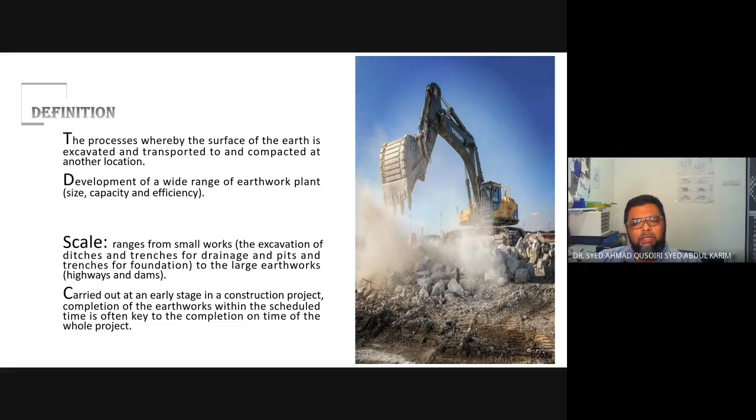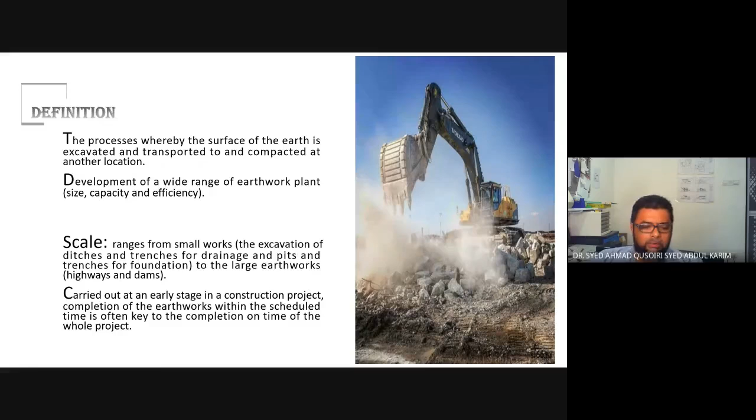The earthwork itself needs to be planned properly, and planned in accordance to the climate and weather, so that it will not get stalled due to rain, snow, and things like that. The success requires adequate site investigation, preparing practical and satisfactory design of earthworks, and the choice and efficient use of the plants and machineries.

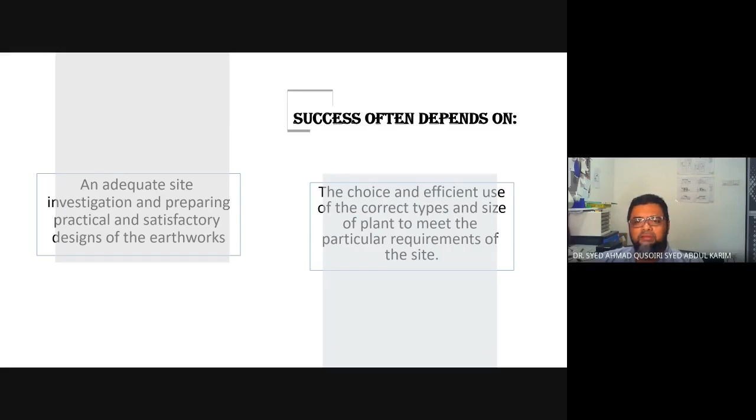Before we start digging, the site itself must be investigated, the condition of the site and whatnot, and also the soil conditions by doing soil investigations. Being able to conduct all these on time will obviously depend on your machineries. So the general considerations for earthwork we have, as I said, the site consideration and also the ground conditions. So we'll go into that, and then the techniques of excavation. Okay, we have 5 there.

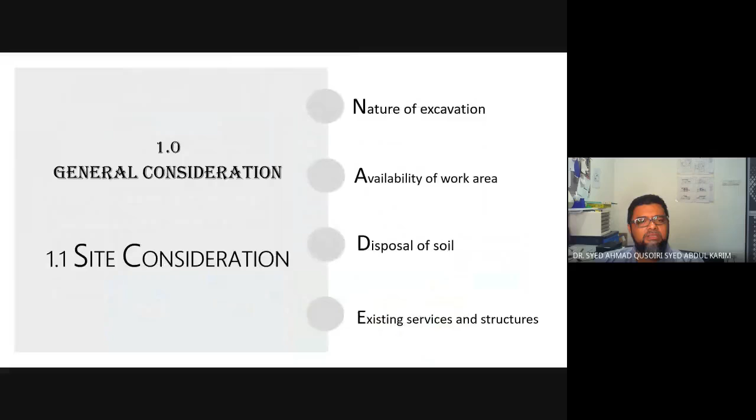Let's go to the first one, site consideration. So the site considerations, we have 1, 2, 3, 4 points here. Obviously, there would be more, but these are the main points. First of all, the nature of excavation. So, what kind of excavation are we talking about here? The situation of the excavation to reduce level, roadwork, trenches, basement.

So there's a lot of types of excavation, whether it's to reduce the level to reach the platform level that is required, or we are doing excavation to dig up trenches, or to create pits or holes in the ground. If we are talking about the larger scale, we are talking about basements. Or even the excavation itself is being done for tunneling. So that is considered as part of the earthworks.

We have to consider the time available for excavation and the sequence of the completed earthworks. So depending on the type of earthworks, usually we have limitations, especially in terms of space available for people to conduct the earthworks. We have a limitation in terms of time. We have limitations in terms of the machines that are available to us. Before the earthwork even starts, it needs to be planned meticulously in detail.

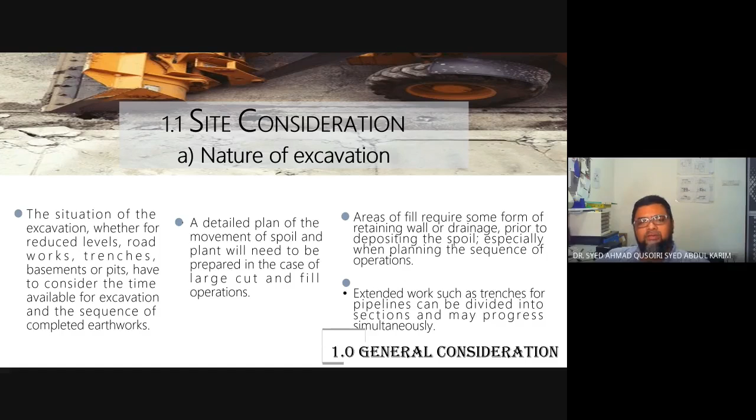Each of the packages will be awarded to a contractor — the second package to another contractor, the third package to another contractor. So all these packages can run simultaneously, instead of having just one contractor do everything, which would take a long time. That's the nature of excavation. The second point in site consideration is the availability of work area.

So the term work area does not include areas for site admin or accommodation of workers. This is just a place for people to work.

The total work area should be indicated on a site plan so that movement of plant and materials can be efficiently planned. This is when the contractor needs to come up with the method statement for site excavation, with a proper plan showing the work area, admin, accommodation, entrance for plants and machineries, areas to excavate first, and location of the excavator. All these things need to be spelled out in the drawing and the document. Work area is the total space available for the manipulation of plant and storage of materials.

If you are talking about excavation for reduced level, normally in terms of access, there won't be much issue. But when we are into excavations for deep trenches, or deep pits for construction of a basement, then we are talking about a very cramped working area. The flow of manpower, machineries, and materials needs to be orchestrated properly, because people will need to be sharing the work area together.

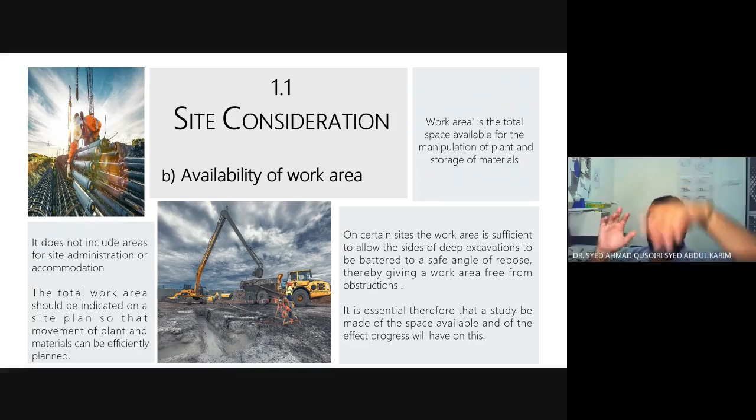Depending on the size of the pit, there will come a time where there are so many obstructions in the pit that we can't even place our machineries there. That is when they need to use other solutions, such as a long arm excavator located at the top of the pit to do the excavation, or use small scale machines, or even go 100% manual.

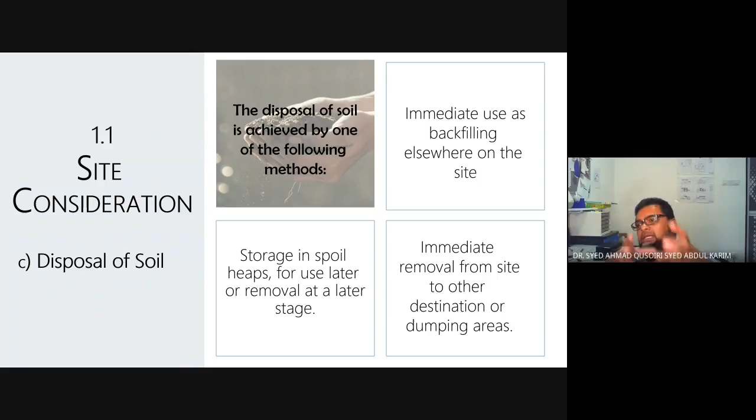Next, the third point is the disposal of soil. If you are not reusing that soil, you need to dump it somewhere. There are three types. First, the most economical is immediate use as backfilling elsewhere on the site. You do your excavation, and that spoil can be taken immediately to somewhere it can be used as backfill. Maksudnya, your excavator excavates, puts it on the dump truck, and the dump truck goes where the spoil is needed and dumps it there. So you save in terms of time, cost, and number of machines that you need to have.

The second one is storage in spoil heaps for use later or removal at a later stage. Again, your excavator excavates, puts it on a dump truck, and the dump truck goes somewhere and dumps the soil there. If that soil needs to be used at a later stage, we need a bulldozer or a loader, depending on your method statement. Maybe a loader goes to the spoil heap, longgokkan tanah, it will load up on the spoil and put it on the dump truck, which will then carry it to where it's needed or to the disposal site.

So on that method statement, you would need one extra machine, which is the loader. Okay, so that is an extra cost for you.

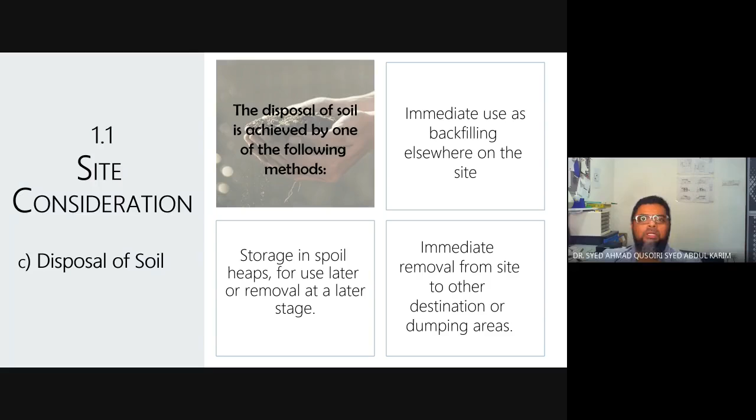When we talk about using the spoil as backfill, not all type of soil can be used for backfill. Okay, especially the topsoil - that cannot be used. It can be used later only as a topsoil.

So when these materials are being gathered, it needs to be separated. You separate the topsoil from the actual soil itself. And then you separate it if you have rocks.

So consideration should be given to the position of such spoil heaps, in order they should be positioned that they do not interfere with access. Okay, when you need to use the soil later and you want to put it somewhere, it must not be at the middle of the road.

Okay, so the position where you want to dump all your spoil to be used later also needs to be indicated clearly in the drawing. Okay, so that it doesn't become a danger to everybody and it is not blocking the access of workers and machines.

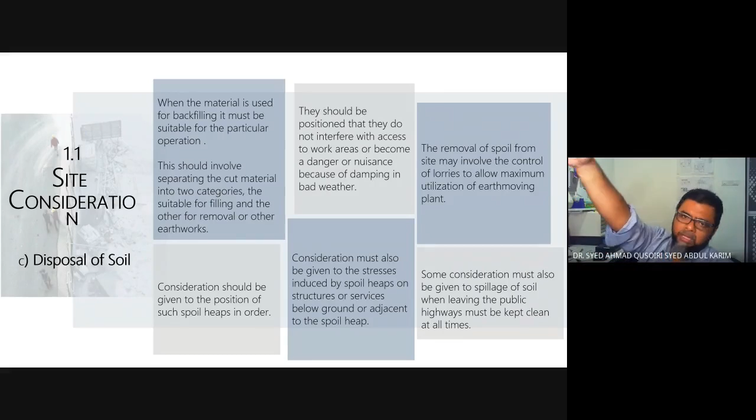Okay, so usually there's a calculation for this. Depends on how far the dumping site is, how many dump trucks we have, how fast can they travel, this kind of things. Okay, there's a calculation for this. But I don't think you will go that detailed. But I have done that calculation, okay, when I was studying. Okay, it can be quite interesting.

So some consideration must also be given to the spillage of soil when leaving public highways.

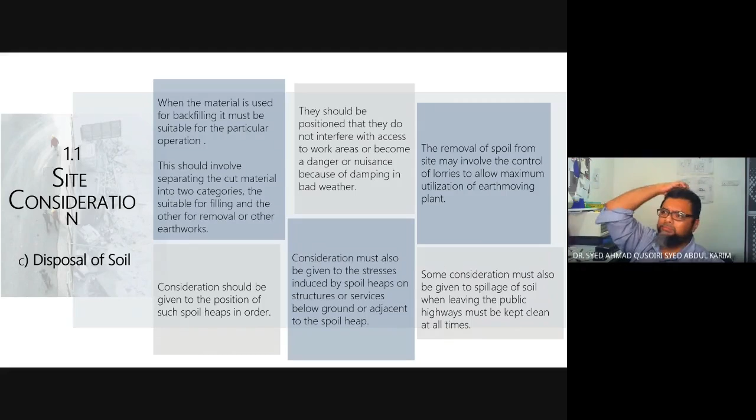When your dump trucks need to leave the site to get to the dump site, again it needs to follow the rules and regulations of the road, and the dump trucks must be covered with some sort of plastic cover, things like that. And then obviously, whatever they do, there will certainly be spillage of soil. Of course they have cleaned up their dump trucks before they leave the site, but still soil will fall onto the road.

The dump trucks, which are heavy, would obviously damage parts of the road or the roadside. So these kind of things, the contractor needs to pay attention to, needs to clean them up, and then all the damages to the public road, to the public facilities, needs to be rectified, needs to be repaired. And this will incur cost to the contractor.

So all these things need to be put into the overall cost of the earthwork itself. It's not just the cost of digging up the soil. There's a lot more that will contribute to the increase of the cost of the earthworks.

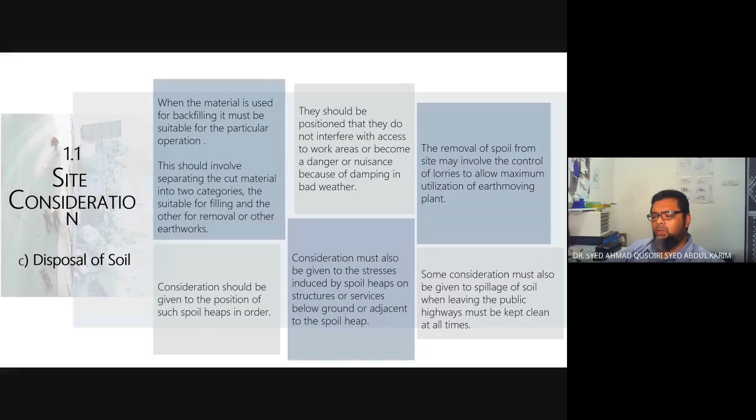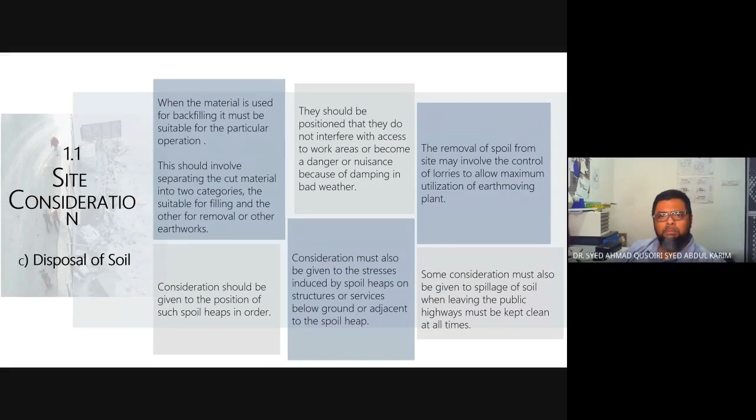So that's why the best earthworks is the most minimum earthworks. We want to do earthwork as little as possible. This is of course to reduce the cost, but also to reduce the impact to the environment, to society, things like that.

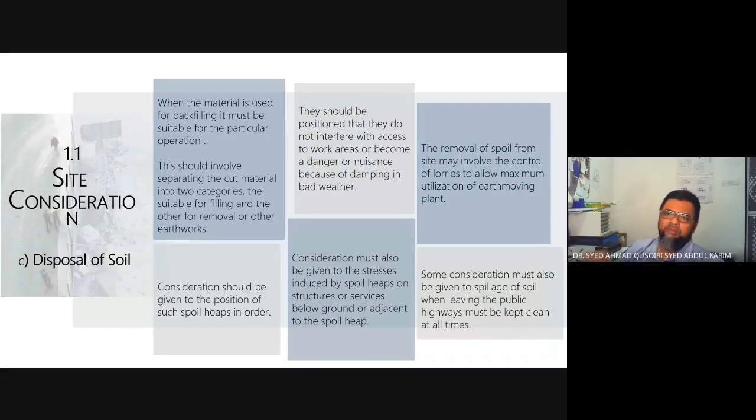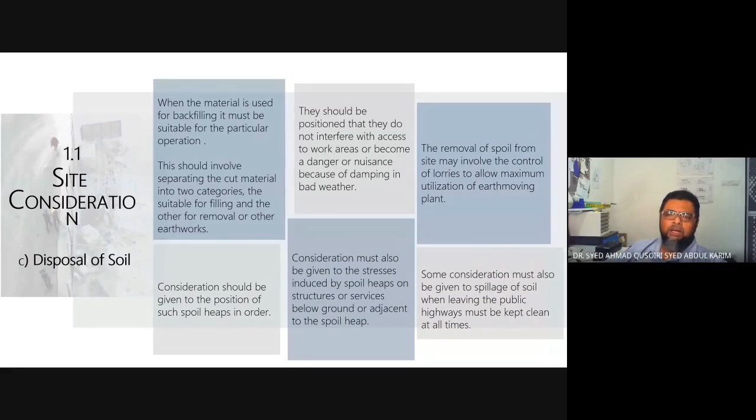So that's why when we see roads that go through the mountains and things like that, we will follow the contour of the mountains. It will not go through the mountains, although there are some roads that practically go through a mountain, but usually they would follow the contour. This is to keep the cost down.

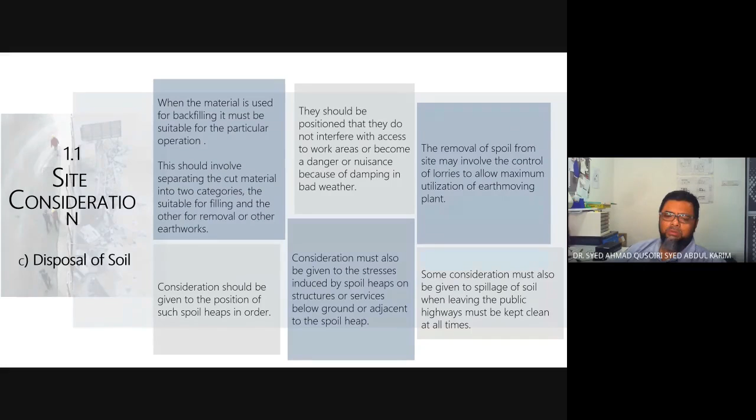And the fourth point, existing services and structures. This is when you are doing your earthworks smack in the middle of a city, or what they call a populated area. So care should be taken to establish the position of all pipes, cables, and underground services, which should be clearly marked before earthworks commence.

So it is the duty of the contractor to find out as much as possible what services are passing through their site. This is very important if you have an elongated site, such as road construction, trenches, and things like that. Obviously there will be services or underground structures that pass through your site. So the contractor needs to find out where the pipes are, where the cables are.

We just had an incident where a contractor damaged a TNB power line, and people ended up with no electricity.

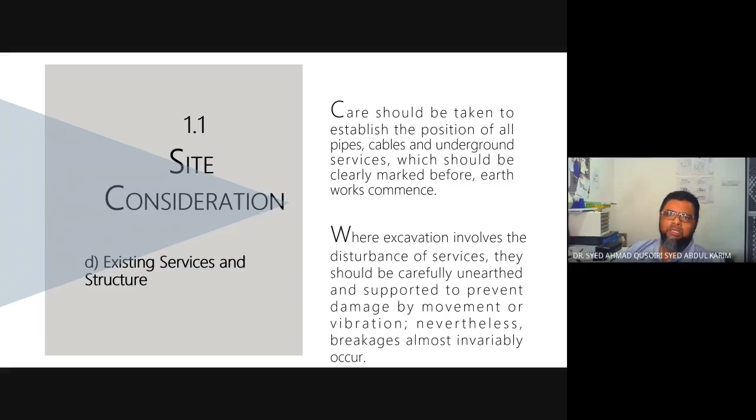So other solutions need to be carried out. Existing structures adjacent to the excavation area will require support.

This is when you are trying to support the services. So these are the supports that you can use. Cut-off walling: a thin watertight wall of clay or concrete built up from a cut-off trench to reduce seepage. So you basically are building a wall underground before you start doing your excavation.

So this is a concrete wall, usually these days, a cut-off wall. We can also use sheet piles. Sheet piles are usually for temporary works, while the cut-off walling is for permanent use. We drive the piles into the ground, and they interlock with each other so we can make them watertight.

And then we start excavating inside the row of piles. And then we can also use underpinning.

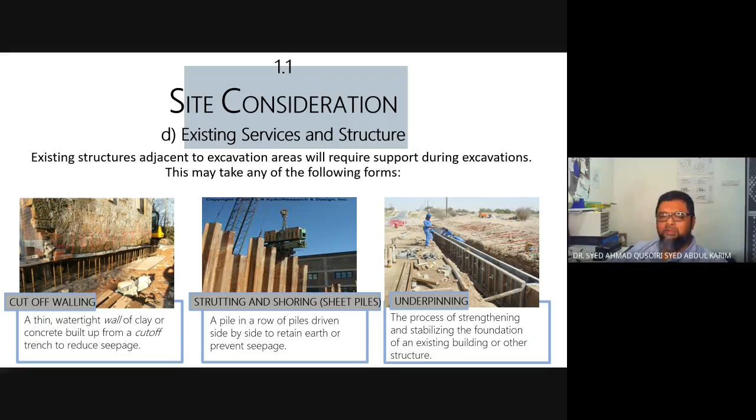This is when we need to strengthen or stabilize the structure adjacent to the site that we are digging. This is usually for basement constructions in the middle of the city, because basically you're digging a deep hole. So no matter how much support you put, there will still be movement to the soil. So to avoid this from damaging the structures around it, we can support the structures, especially the critical ones, with underpinning.

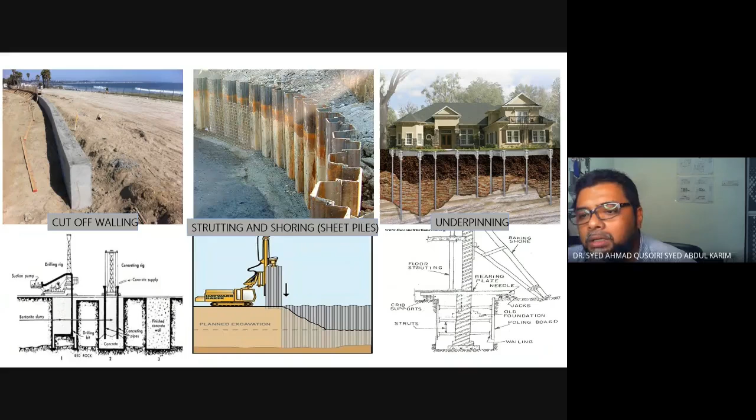So you can see here the examples of a cut-off walling. This is a permanent feature. Sheet piles serve the same purpose, but are more of a temporary feature. And the underpinning works to strengthen the structure.

This is on ground condition. There's not a lot of stuff here because it can be quite technical, but in general, the information obtained from the site investigation, which we've previously talked about, will assist in the following factors. Number one, we want to determine the ground support required during excavation - what type of ground support we need to use, how much, and how elaborate the design is.

Those kind of things. Number two, the method of keeping the excavation free from water. As we know, water is the number one enemy for doing excavation, especially pit and trench excavations. So we want to remove the water from the pit or trench we are excavating, and also consider the types of plants that need to be used.

Consideration needs to be given to the change of soil stability due to adverse weather conditions. This is because the presence of water will reduce the load-bearing capacity of the soil. The water acts as a lubricant that makes it easy for the soil particles to move. That's why we have landslides and whatnot happening, usually after heavy rain - this is because of the water itself.

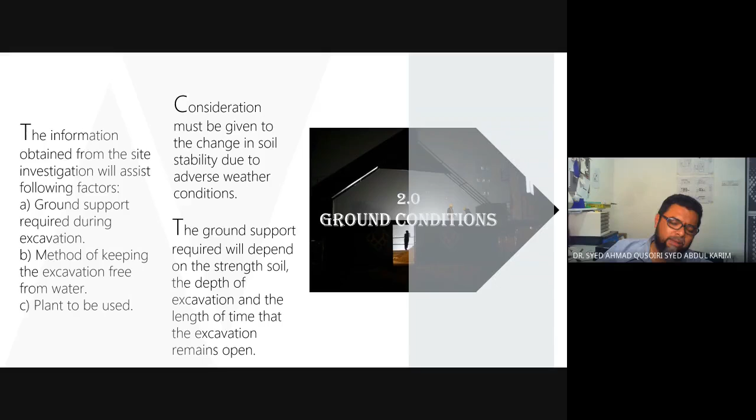Basically, the deeper you go, the more elaborate and rigid type of ground support is required. And the longer the excavation remains open to the weather, the more elaborate types of ground support are needed. So that's why the best kind of excavation is the kind that can be done relatively quickly, but usually that is not the case.

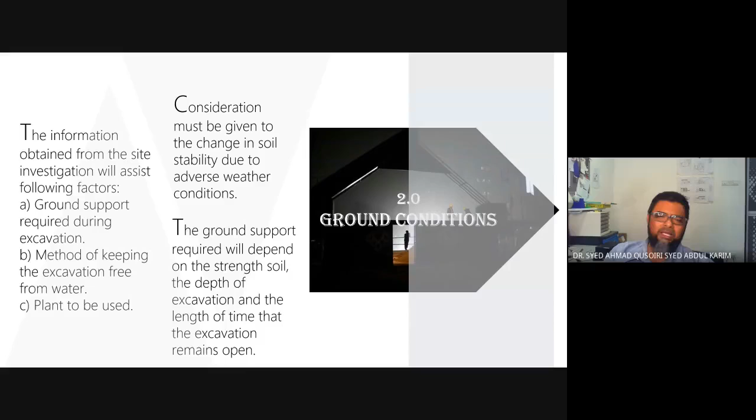So, various techniques of excavating and their choices - we will go through some of them. We have bulk excavation, rock excavation, support, embankments, and trench excavation.

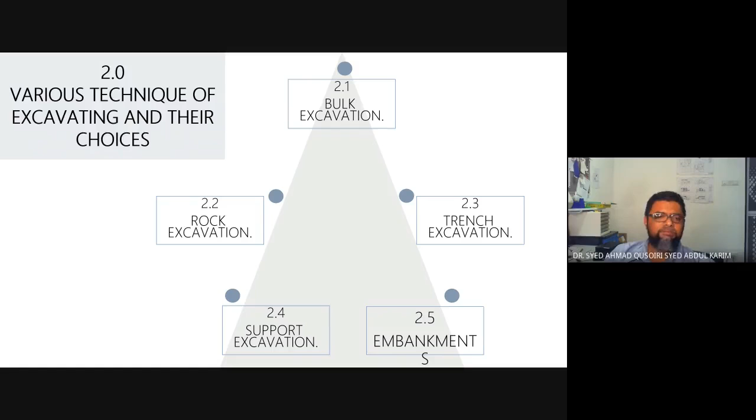First of all, bulk excavation - groundworks which remove large amounts of materials and reduce the general level down to near formation level. They are made with large and efficient excavators, so these are excavations made in huge quantities. That's why they are known as bulk excavation.

The operations which might be involved in bulk excavation include cutting, cut and fill, basement, large pits, and hand excavation methods.

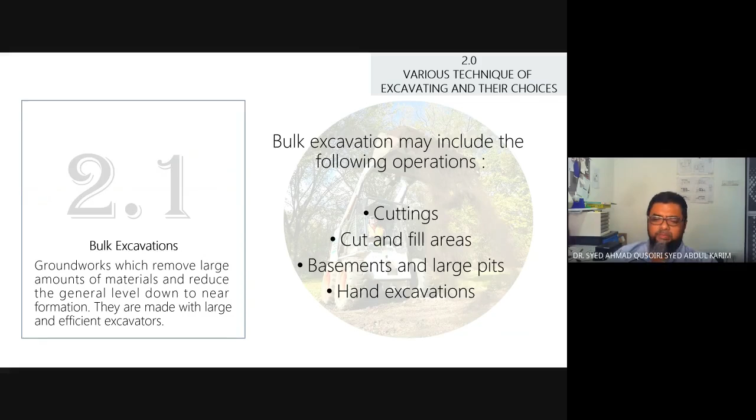In terms of cuttings, it's done for canals, roads, and similar forms of construction. The plant being used depends on, again, the quantity of soil you need to deal with, the distance of the disposal area, conditions on the ground, water level, and those kind of things.

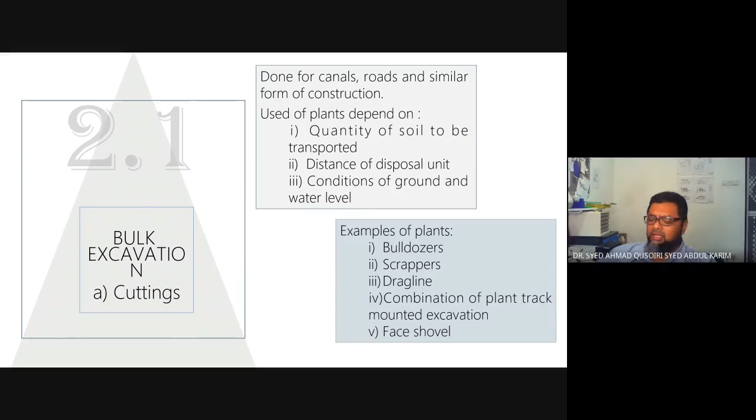As I mentioned previously, in terms of types of plants - there's a lot more earth-moving plant than this, but these are the main ones. First of all, we have bulldozers, scrapers, drag line, combination plant, track-mounted excavators, and face shovel. So these are some of the examples.

This is a bulldozer. The bulldozer is the most powerful machine that is available. It's used to push the soil into heaps or a collection of spoil heaps. So you can't use the bulldozer to pick up the soil or anything like that.

And then we have the excavator - some call it a backactor, but people call it excavator. This is the hydraulic version of the excavator, the hydraulic excavator. This is the typical reach, and this is the long arm reach.

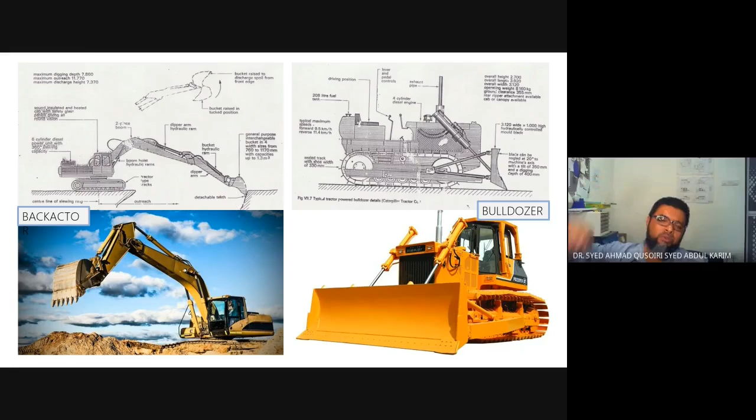Excavators are very popular these days, especially hydraulic excavators, due to their precision and reliability. Okay, you can dig a massive hole with this long arm excavator. And we can use the excavator not only just to dig, but to lift the soil and put it onto a dump truck in one movement.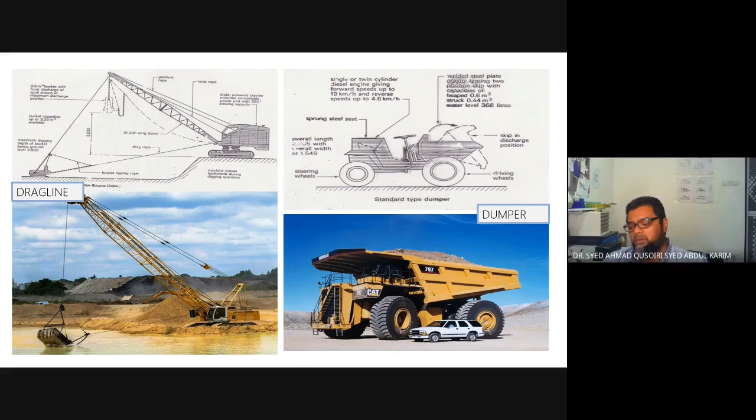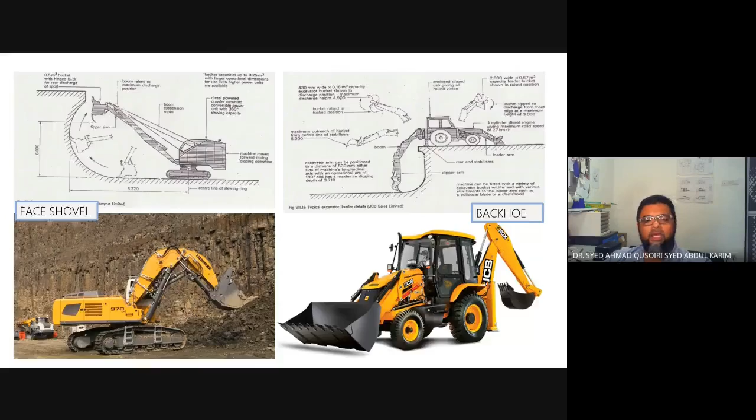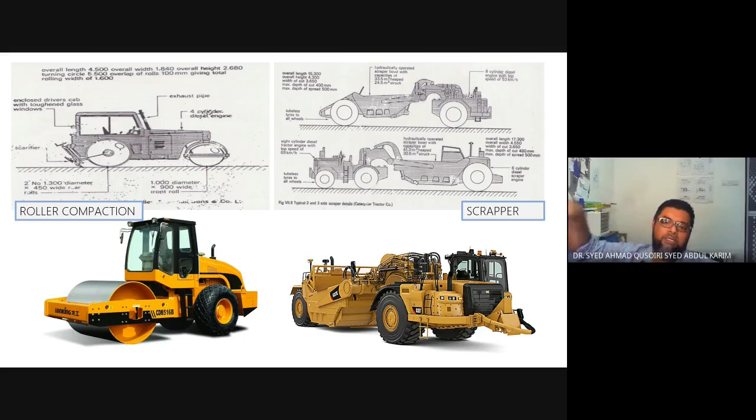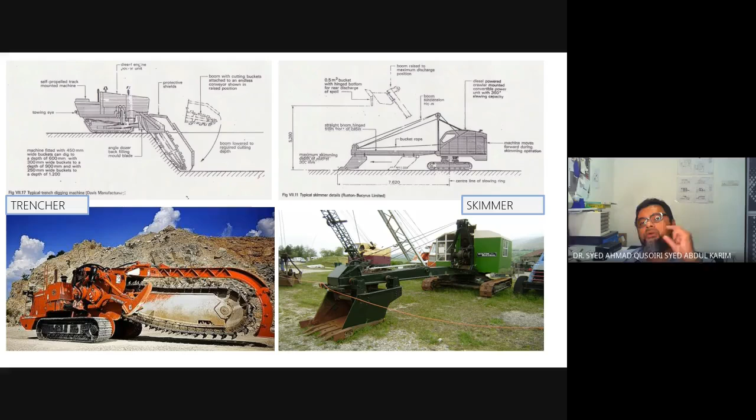This is a skimmer. So it looks like a face shovel, but it can't dig a hole; it's being used for excavations to reduce level with great precision. So you can see this boom. When it is lowered, the bucket will be lowered, and then the bucket will be moved forward. So soil will get into this bucket, and it will be dumped to the nearest dump truck.

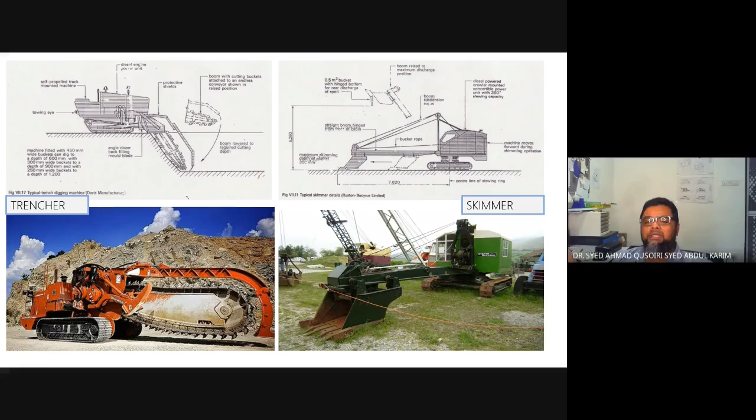However, the use of the skimmer, in terms of output, is not that much compared to other types of machines. So that's why it's not that popular these days.

So next, enough with the machines. Shallow cut and fill, still in bulk excavation. So this is what we call excavation to reduce level. It normally occurs in road works and airfield construction. It's a shallow excavation with plant that may have to stop work to prevent damage to the formation level. We use this to reach a platform level, which is under the original level, but it is usually not that deep.

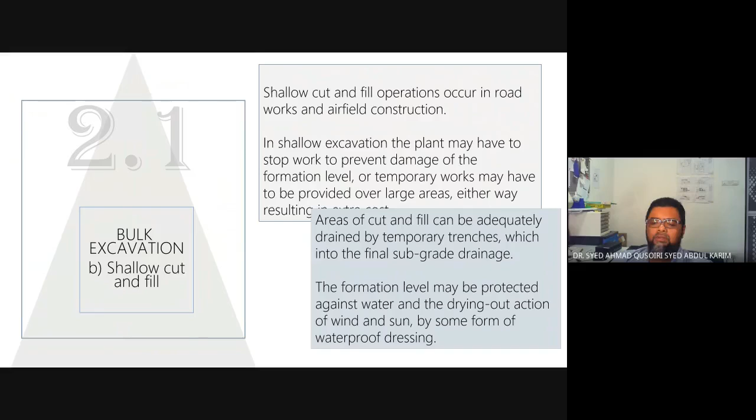Areas of cut and fill can be adequately drained by temporary trenches. This is how to clear the working area from water. So we can build surface drains, and protect it from the water by using some waterproofing materials.

Next is basement construction. So this is an example of a site for basement construction. I don't think this is in Malaysia because here you can see that they are using soldier piles for the retaining wall, which is not what we normally do. So basement excavation is when you dig a deep pit over 4.5 meters deep. If it's over 4.5 meters, then that is categorized as a deep pit.

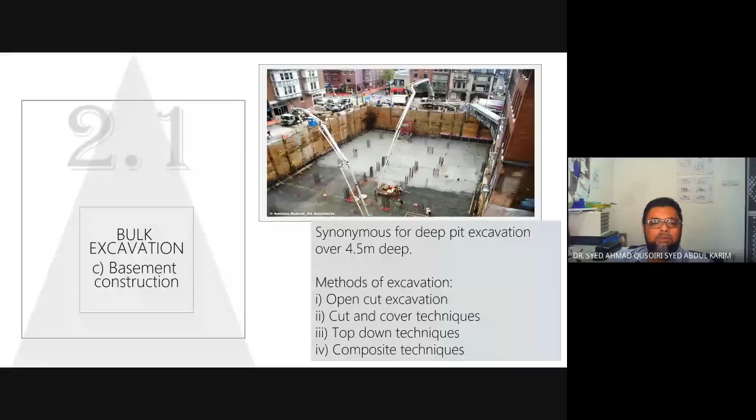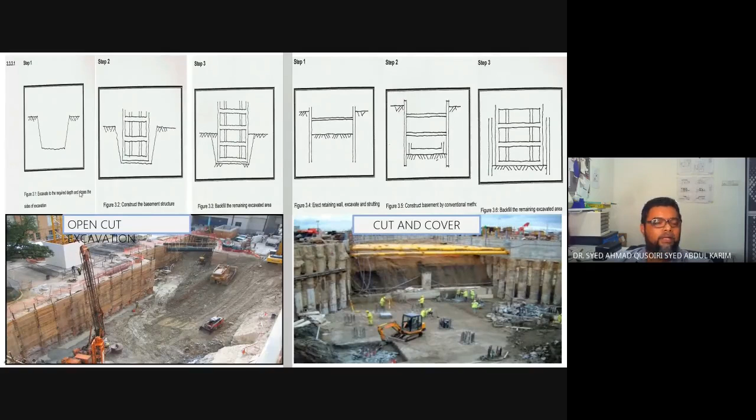So to dig this gigantic hole in the ground, there are four techniques that can be used: open cut, cut and cover, top down, and composite. So we'll go one by one. Open cut is a very straightforward method. First of all, we excavate to the required depth and we have the slope at the sides. If not, we would have to use a retaining wall.

So the first process is just to dig a gigantic hole to the formation level that is required. When it has been done, you can start to construct the basement structure from that formation level going upwards. Of course, you have to prepare all your substructure works that are not mentioned here. So you dig a hole to the formation level, construct the structure from the bottom up, and when the structure has passed the ground level, you can start to backfill the hole. That is open cut.

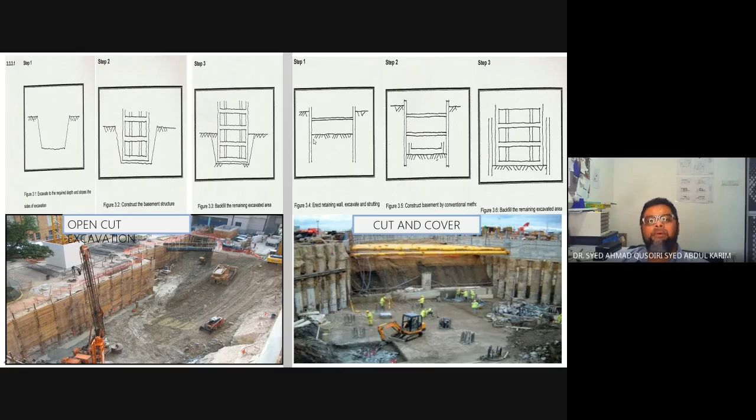Cut and cover. First of all, we create a retaining wall at both sides. This can be either a temporary or a permanent retaining wall. If it's a permanent retaining wall, it will become part of the core structure. Once you have done the retaining wall at both sides, we start to excavate within the boundaries of the retaining wall. Once we reach a certain level, we put in the strutting or the braces to prevent the wall from collapsing into the void.

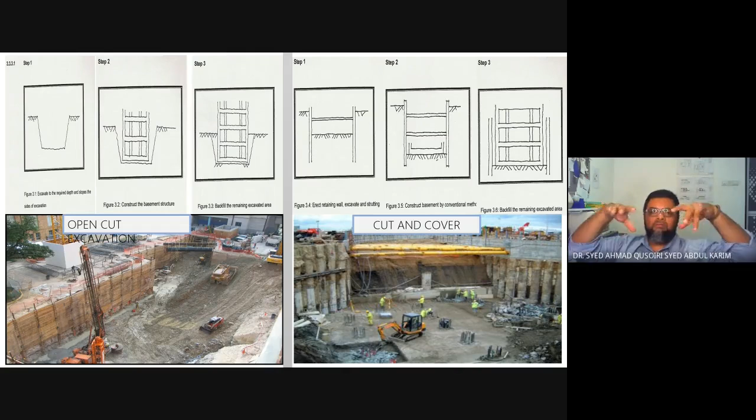And then we continue the excavation to the next level. In this case, this is the formation level. And then put more strutting at the second stage. Once we have reached the formation level, we start to build from the bottom up. When the structure has passed the ground level, we start to backfill the outer areas of the basement. So obviously this cut and cover method is more complex compared to the open cut.

But usually due to the limitation of space, we still use this cut and cover method. If you have a lot of space, then by all means, please use the open cut method because it is the easiest and the cheapest.

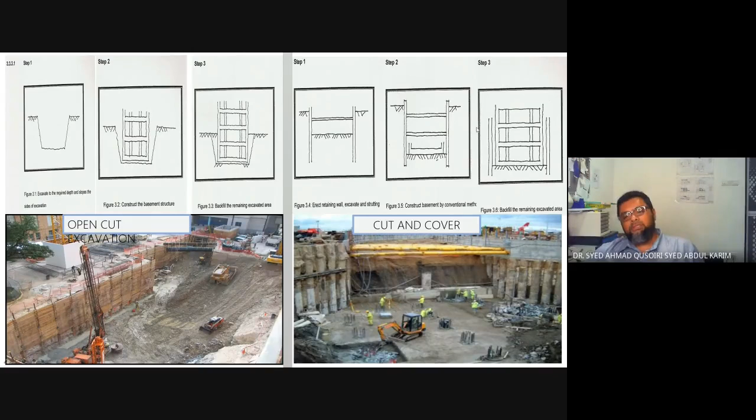Okay. Cut and cover, because you have all these struts going between the retaining wall, it is an obstacle. So it can be quite difficult to put your regular machines into this hole. So that's why in this picture here, you can see that they are using miniature plants and machineries, and quite a number of manual workers.

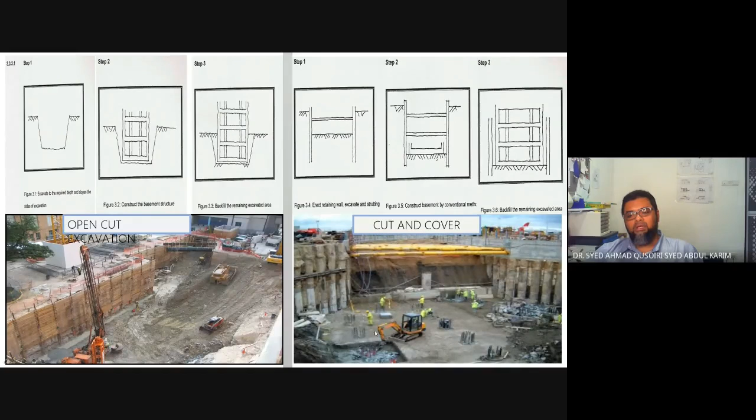Next is the top-down technique. Normally being used for tunneling operations. So first of all, installation of retaining wall, and then we excavate, and then we install the struts, the bracing, and then we start to construct the underground structure.

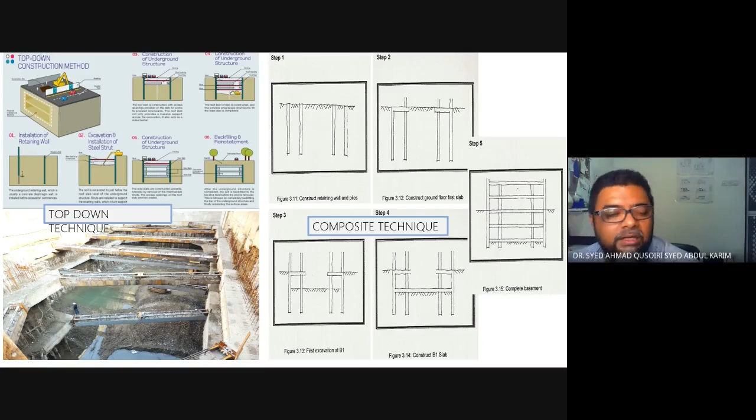Okay, excavate even more, and then when they dig deeper, obviously they have to put in more struts. Same as previous. And then instead of the structure going above the ground level, it will stay underground. So the top part we will start to put the concrete slab, and then we will cover the entire structure with backfill material.

Okay, next is the composite technique. Composite technique is a combination of both, meaning that you are digging underground as well as constructing upwards at the same time. Previous method, we have to dig downwards first, and then we start to build upwards. But in this composite technique, we can dig downwards and construct upwards at relatively the same time.

So how do we do that? Okay, it's nothing short of a miracle. First of all, they have to construct the permanent retaining wall and the structural piles of the building. So the substructure works need to be completed. Next, they will build the ground floor slab. And while they are building this ground floor slab, they are leaving quite a big hole at the middle in this case. This functions as an access for people who need to work underground.

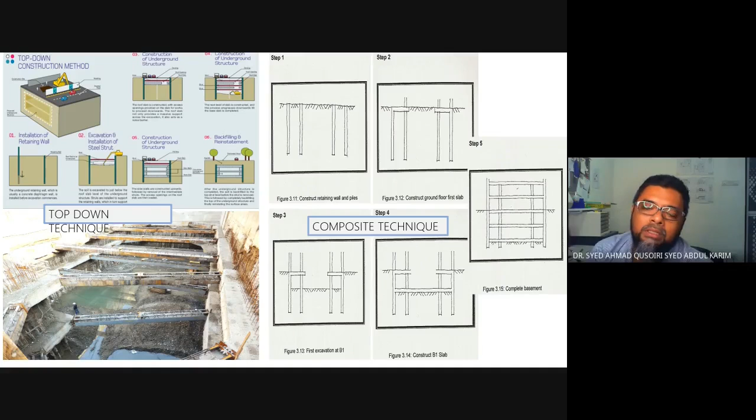Okay. So obviously the composite technique is more complicated in terms of the workflow, and there will be a lot of people all converging in the same area. We have the underground people, we have the superstructure people. So with this technique, coordination is very important, so everybody knows where they need to be and they work in accordance to what was planned.

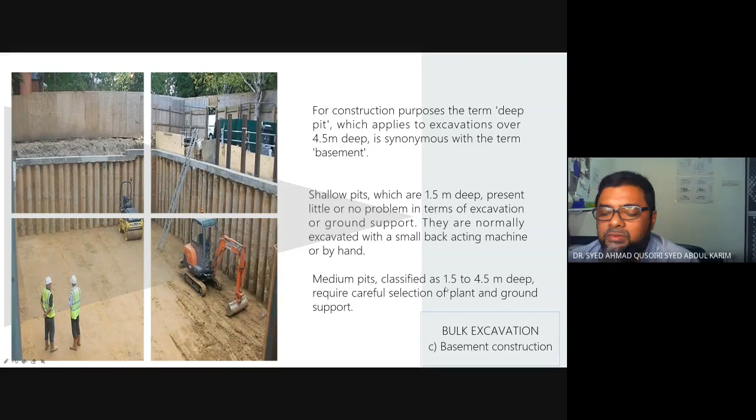This is an example of a basement that is using a permanent wall. This is a secant bore pile. It's basically a bore pile that functions as a permanent retaining wall. So we have deep pit excavation, over 4.5 meters; shallow pits, 1.5 meters deep or less; and then we have medium pits, which are 1.5 to 4.5 meters deep. That's how they classify it.

We are still at the topic of basement construction. Methods used to shore up the soil while we are doing the basement excavation: we have unshored excavation, shored excavation, dumpling method, and cut-off walling. So unshored excavation means that your excavation has no particular support. So that is the first technique.

The open cut method, you don't really need any type of support for the soil. It's enough for the soil to be constructed as a slope, at its safe angle. We can't have the soil like this, like 90 degrees. It can be quite dangerous. So normally we will create a slope so that the soil does not come crumbling down.

Okay, and then we have shored excavations. So these are excavations which are being supported. Let's see now. Okay, so shored excavation can be many things. We have the common type, the soldier pile.

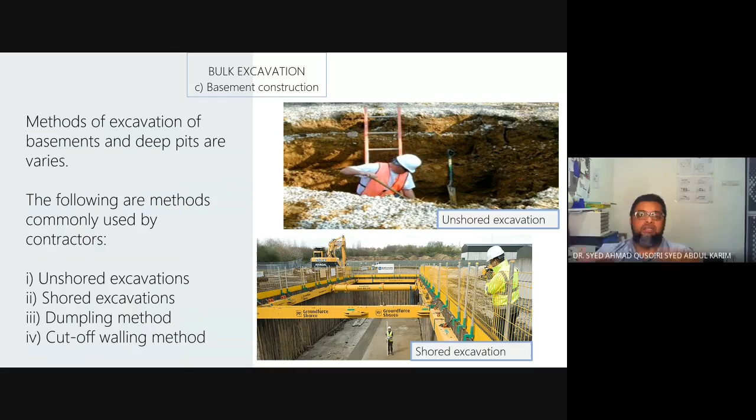Okay, so there are many more here which are not going to be covered at all. If you want to know more about that, you have to go to the topic of basement construction itself. This is more on earthworks, and then dumpling and cut-off walling methods.

So this dumpling method is used where buildings or the site is near the street. A series of retaining walls is trenched section by section around the site perimeter. So we have your site, and in this case, they are using sheet piles, two layers of sheet piles that act as a barrier, a retaining wall.

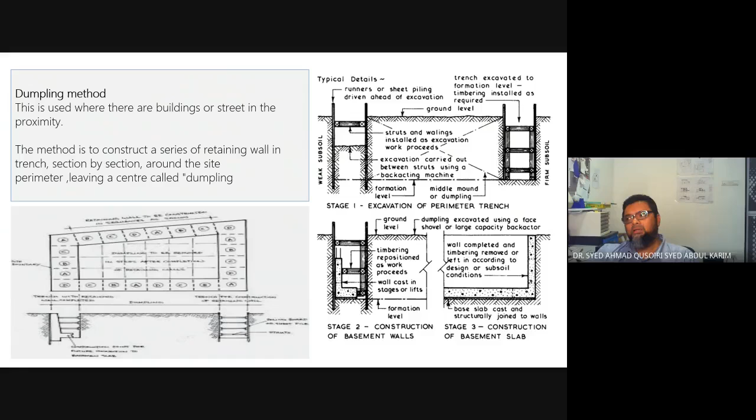So in here, they will put in their struts as they dig deeper in this dumpling area, and then they will start to build the retaining wall itself. So this is a very old-fashioned way to create an underground retaining wall.

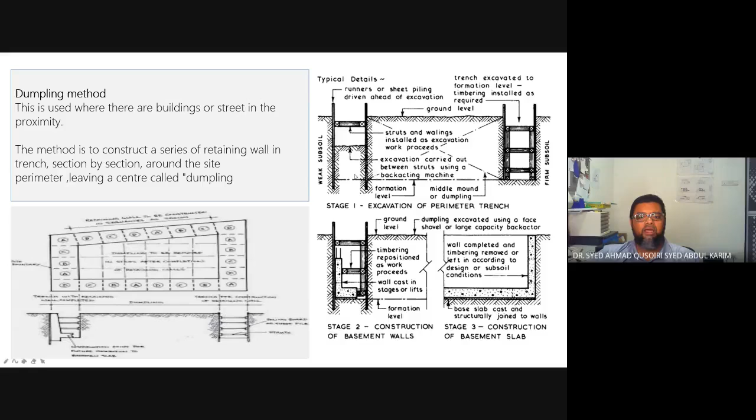These days, people build by using this cut-off walling method. So we don't need to have people actually go underground between these struts to build the underground retaining wall. This is a very hazardous process, so these days we have machines to take over. It's known as the cut-off walling method.

So what we use is a special grabber, and the thickness of the grabber is about the same as the thickness of the wall that we are going to build. They will build this section by section. There is a sequence that they need to dig, and they will skip sections accordingly.

They will start to dig by using this grabber up to the depth that is needed. And while they are grabbing, they will pump in the bentonite slurry, or the mud, to prevent the wall of the excavation from collapsing.

Once they have reached the lowest part of the excavation, they will put in the reinforcement cage. This reinforcement is already pre-prepared and just lowered into the hole. From there, they will start pumping the concrete from the bottom up until it reaches the surface. Then they will leave it to dry while they work on other sections of the cut-off wall.

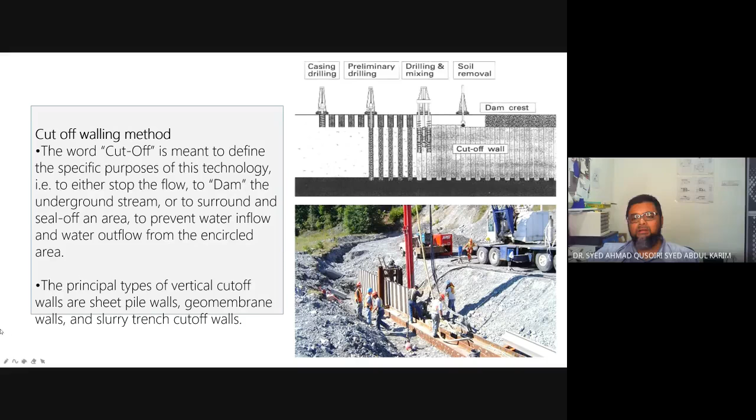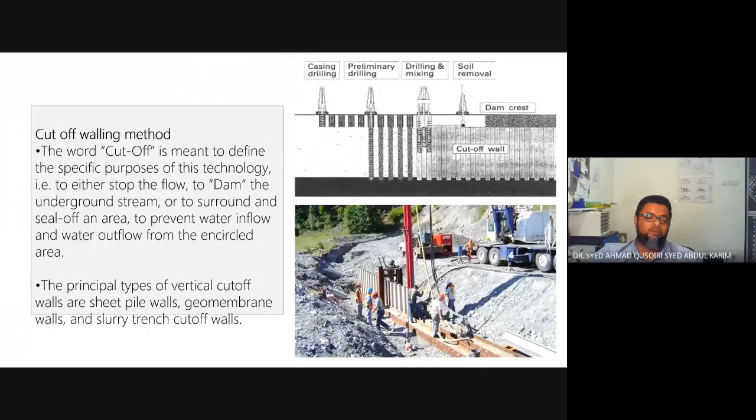So you do not need to have people go down there and actually dig the soil or hand build the underground retaining wall, so it's a lot more safe. However, there is still the element of danger. If somebody falls into this small hole, they would quickly end up at the bottom of it, so there's still the element of danger there.

So you have to remember that when we are digging pits or trenches into the ground or underground, we would need some sort of ground support so the ground does not collapse. If you do not want to use this type of support, make sure that your site has a lot of space.

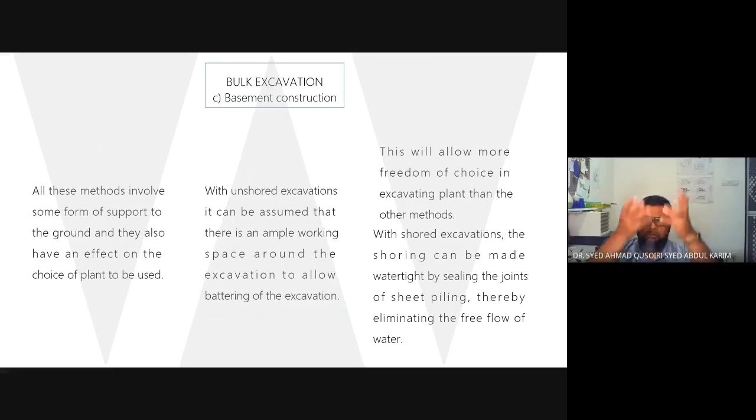And also there would be some issue in terms of movement of plants, machines, materials, and workers. The safety of workers should be taken as a primary concern, in terms of underground lighting, movement of excavated soil from underground, providing air into the underground excavation, and also keeping the underground excavation free from water.

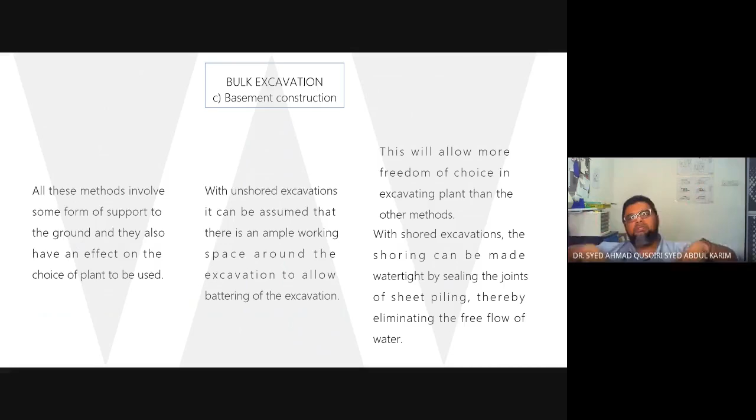So that's why for earthworks, normally it would cost a lot. A good chunk of the construction cost of a multi-story building will go to the earthwork construction.

So next is a method known as hand excavation. This method sometimes has to be used as a last resort because of limitations, maybe there are too many struttings, too many obstacles, or the working space is very small so you can't put machines in there. So you have to have workers to manually dig up the soil.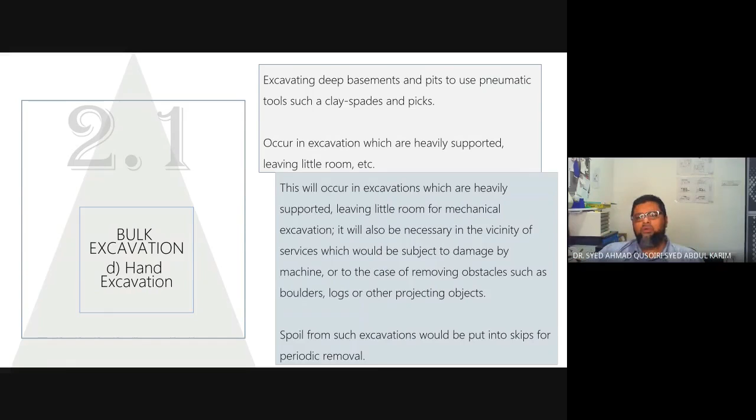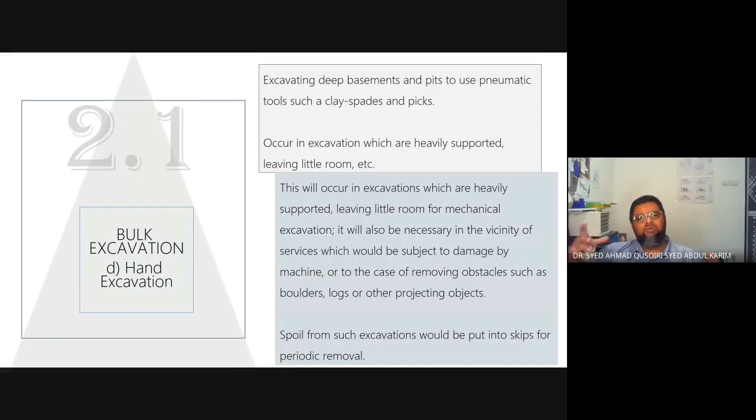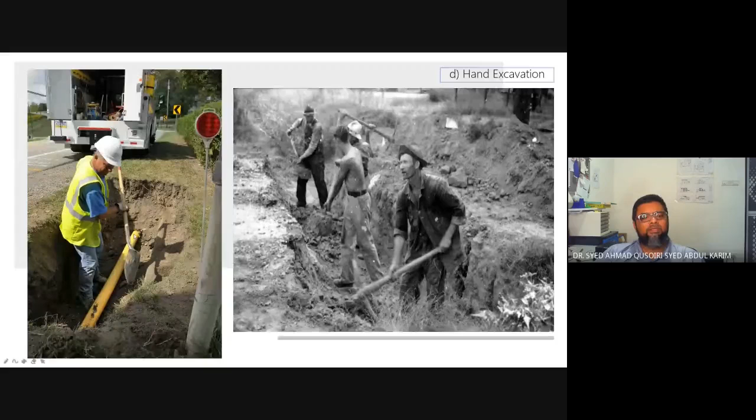These days they don't have to just use your typical spades and picks. They can also use some sort of power tool to help them in their work. These are some of the people who need to do manual labor. You can see that this worker here is digging around services, so this has to be done very carefully, and cannot be done by machines.

All right, so that is it for today. Our next topic will be on rock excavation. Inshallah, we'll be covering that next week.